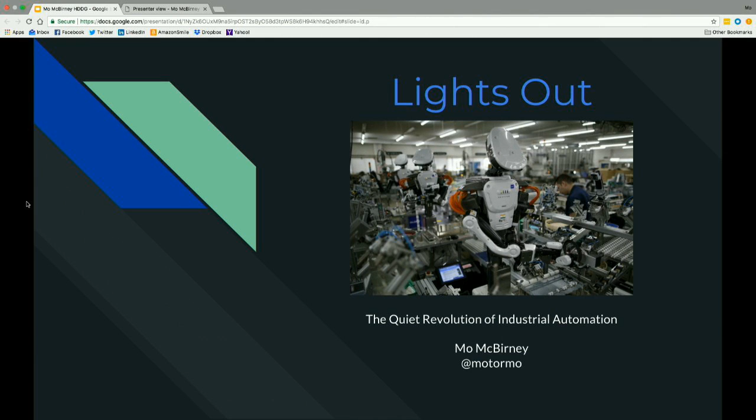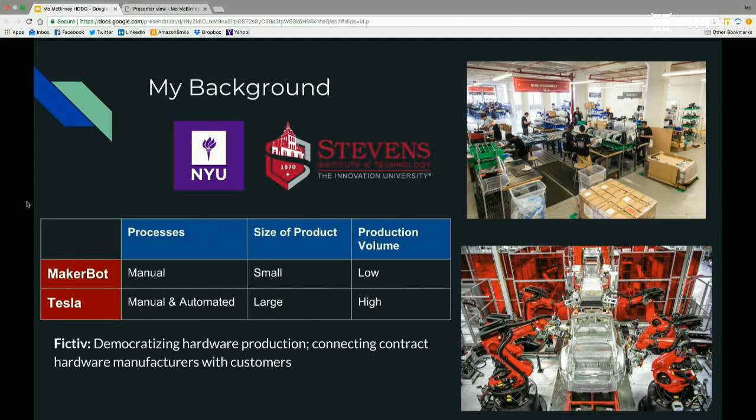So a little bit about me. I have two bachelor's degrees, one in math from NYU and one in mechanical engineering from the Stevens Institute of Technology in New Jersey. After I graduated, I went and worked at MakerBot. I worked in their factory in Brooklyn as a manufacturing intern, so that's where I got my manufacturing roots.

That factory was pretty much all manual processes. I was helping design assembly lines and work on products where we were really building them by hand, using fixtures that we made ourselves. It was extremely manual.

After my time at MakerBot, I went to work for Tesla. I was a manufacturing engineer there for about two years, and that was much more automated—partially manual, partially automated. Our products were much larger; we were making cars instead of 3D printers, and our production volume was much higher. When you're producing a huge number of products all the time, it's much better to have more automated processes because you can make products faster. As Tesla ramped toward the Model 3, with much higher production and cheaper vehicles, they needed to automate more processes, and I was involved in a lot of that as a manufacturing engineer.

Now I work for Fictiv. At Fictiv, we do smaller batch production and prototyping, connecting customers with small contract manufacturers to get their parts made for prototypes and small batch production—CNC machining, 3D printing—and we're expanding into other processes in the coming year.

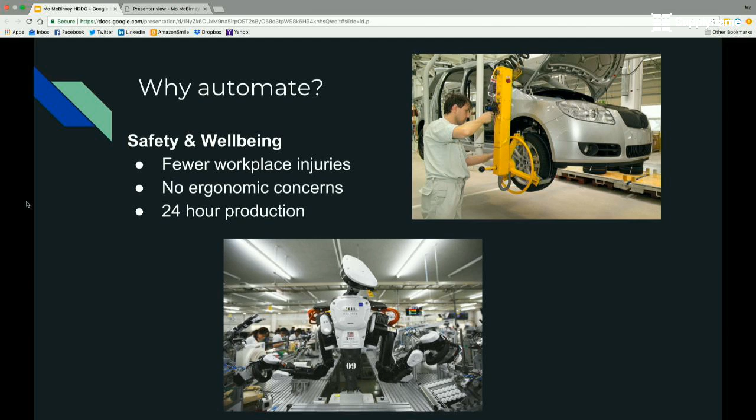Another great reason to automate is safety. After working in a few different factories myself, I can tell you it's difficult to make sure safety is a priority, because you're always balancing speed with safety and quality. You want to produce a quality product quickly and meet your sales numbers, but also keep all of your humans safe. So the more humans you use in a process on an assembly line, the harder it's going to be to keep them safe.

When you automate processes, you have fewer workplace injuries and no ergonomic concerns. Ergonomic concerns are something people don't think about a lot with automation, but it's huge, because when you have one person doing a manual process repetitively many times in a row, even if it wouldn't cause injury once or twice, doing it hundreds of times a day can cause repetitive stress injuries. Ergonomic concerns are huge in a factory, and there are whole teams dedicated to that, so not having to worry about that is great because machines are doing a lot of the heavy lifting.

You can also run pretty much 24-hour production because you don't have to worry about labor laws, overworking people, or fatigue, and that's huge. So that's why a lot of companies are leaning towards automation, because you're avoiding a lot of these human-related concerns. It's better for both the companies and the humans, because you really don't want to put humans through assembly and manufacturing processes that are difficult for humans to do over long periods of time, but really easy for machines to do hundreds or thousands of times in a row.

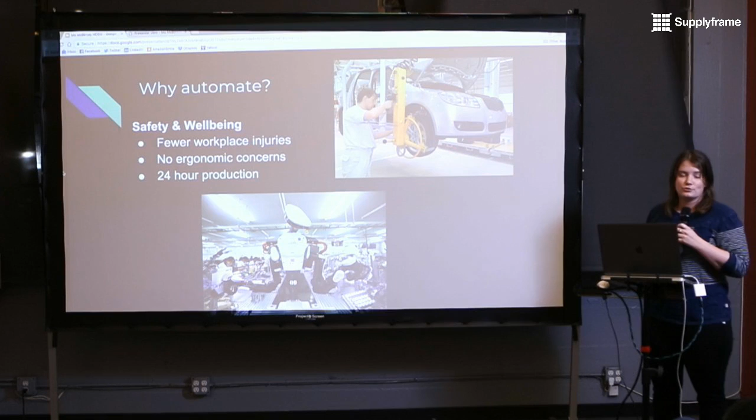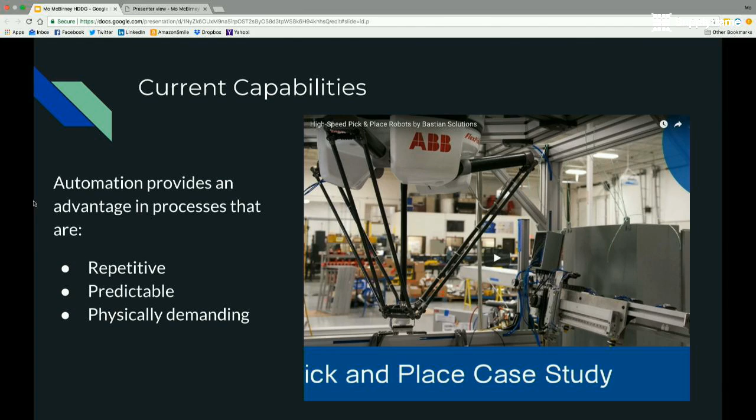So, the current capabilities of robotics. Automation provides an advantage in very specific processes for manufacturing, so it's not the best for everything, but for many things it is the best, because it's great for things that are repetitive, predictable, and physically demanding. Those types of processes are very easy to automate. I'm going to show a quick video about a pick-and-place robot, let's check it out.

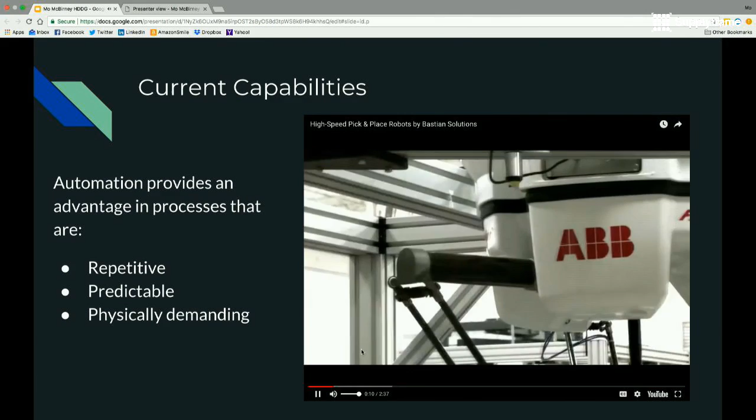I don't know if the sound is working. Is sound attached or no? That's okay. Oh, the microphone to the computer? I don't know if... That's okay, I can narrate.

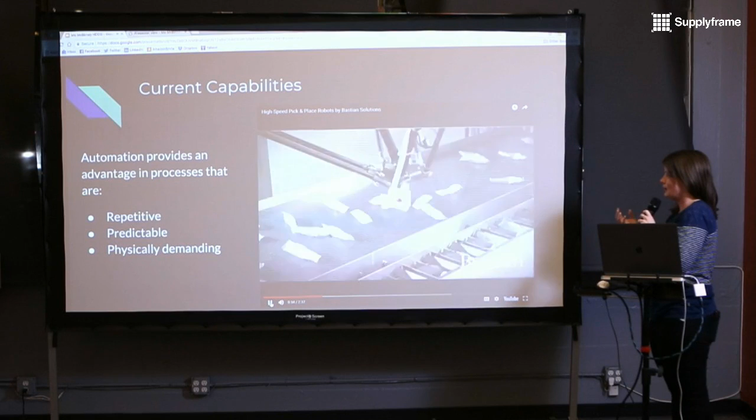This is a pick-and-place robot, and it's high-speed robotic picking. It uses a delta format robot to pick and place lots of small parts laterally across a space. You can see it grips small parts in a very repetitive motion, and it uses basic vision sensing to grab the parts and put them back on the conveyor on the other side. They're discussing some of the benefits: high quality, consistency, and little human interaction.

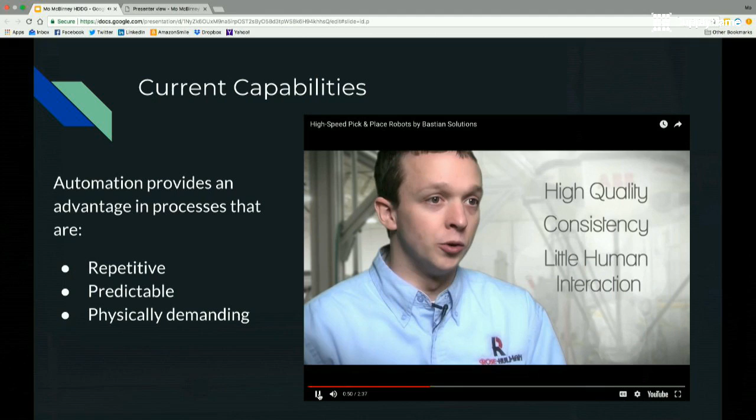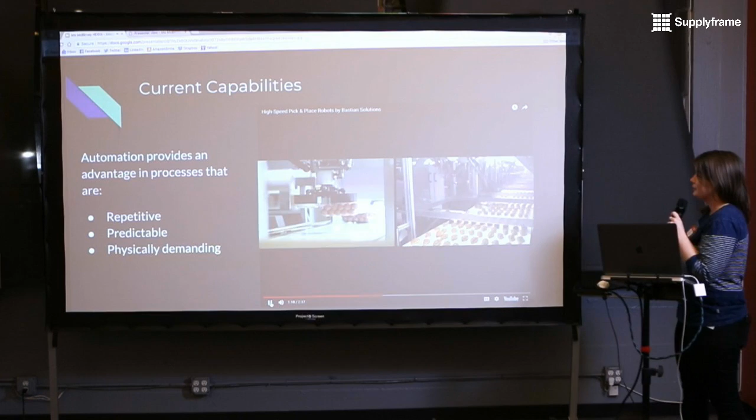One of the main things people focus on in current automation is minimal human interaction, because robots are not good at interacting with humans. Robots work best in automation in factories when they can move really quickly and do processes really quickly. When you have hard, sharp robots moving really quickly, they can hurt people. Especially when they're really big, even with something small like this, you really want to keep humans out of the equation. So there are lots of safety issues involved with using automation in robots.

You want to make sure the humans stay out of it. There are more automation technologies being developed right now which allow for more human interaction, with special sensors that sense when a human is near, so the human can interact with the robot to have it do different tasks. But it's still in the limited stages in manufacturing, and those robots have to move a lot slower, and they also aren't as precise as robots you can program to move without human interaction. That's one of the challenges of current robotics and automation in manufacturing.

All right, so limitations.

It's more difficult to automate tasks that require complex learning. Robots are starting to learn and apply knowledge later, but generally right now it's easiest if they have one task: sense current information, use it to their advantage, do the task, and move on. It's really difficult for them to learn from that.

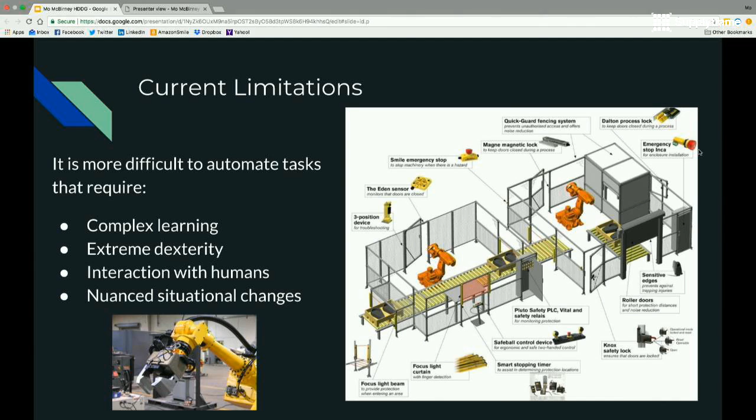Extreme dexterity, you can see on the bottom left a robot with a gripper. Generally grippers are pretty standard and only move in a few different directions, with only a few areas of movement. So it's hard for a robot to grip in non-predictable ways. They can grip one thing or a few things at a time, but it's hard for them to predict what they're going to grip and adapt to that.

As I said before, it's difficult for robots to interact with humans because humans are very fast and robots aren't good at sensing them. So on the right, these are a lot of the safety measures involved in an automated assembly line.

There are magnetic locks, fencing systems, emergency stops, and vision systems that sense if somebody's in the area. All of these are connected electronically to the robot so that if any safety curtain or safety scan is broken, the robot will stop, and the system has to be totally reset before it'll start running again.

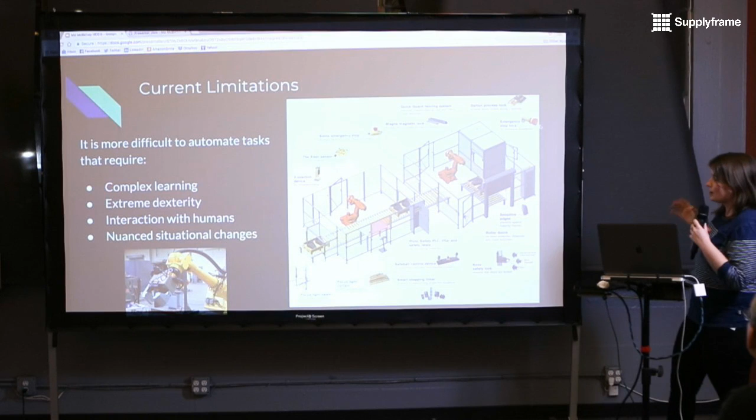A lot of these safety measures are made to keep humans from going into the system. It's really meant to have robots running 100% automation all the time. If humans do have to go in, there are safety measures involved, like a safety curtain that can turn off so somebody can go in, do part of a process, come back out, the curtain goes back on, and the process continues in an automated way.

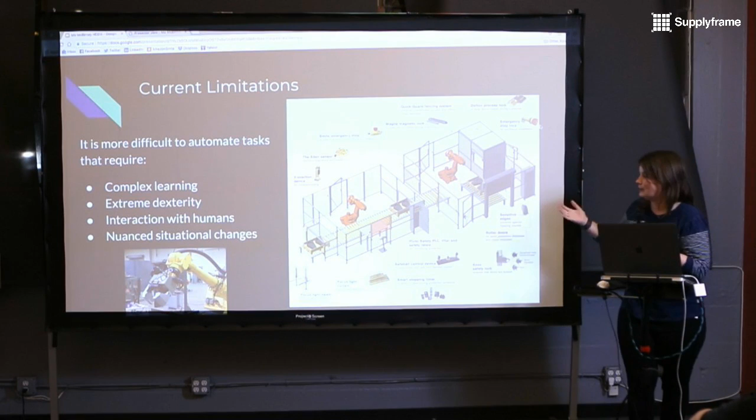So, areas of advancement for robotics and automation in general.

Improvements are going to keep happening in cognition, which is the robot's ability to perceive its environment. Currently most robots use either a 2D or 3D sensor, so they have a limited view of their environment. But as robots learn to see and perceive their environment better, they'll be able to interact better with humans.

Manipulation, precise control, and dexterity. A lot of ways robots interact with parts have to be extremely predictable, and they don't do well with improvising. If a robot can improvise and adapt to its environment better, advances in manipulation will really help automation take over more processes in manufacturing. And interaction is the robot's ability to learn from and collaborate with humans.

The key to the future of automation is to have all the tasks that can be automated, automated, but for things that can't be fully automated, to have robots work alongside humans safely, so that both humans and robots work together to get the most productivity out of that process. Because the reason we're bringing in automation is to increase productivity, so if we can increase it by having humans and robots working together, that's going to be key to the future.

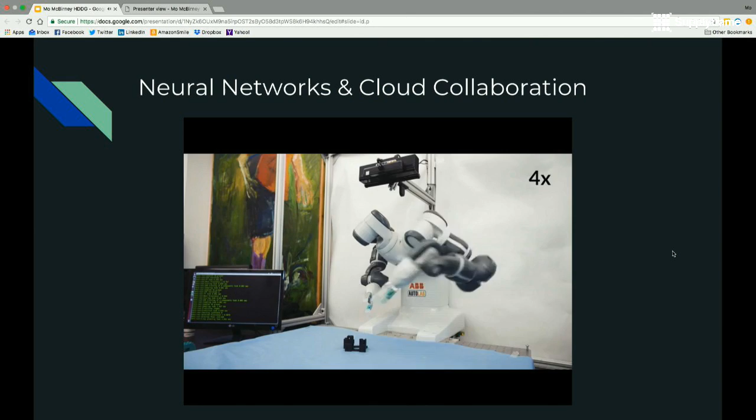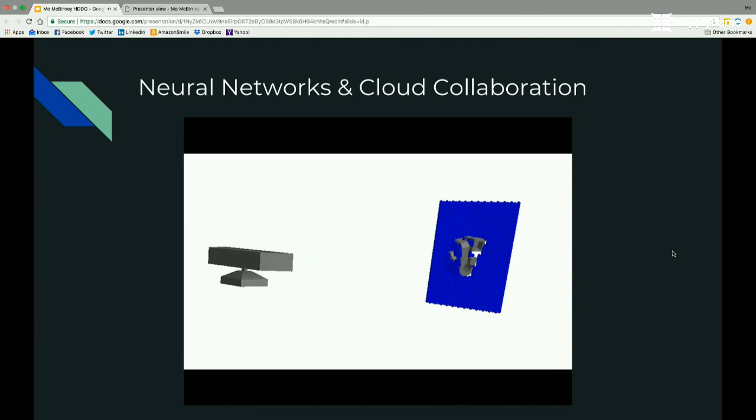This is at a lab in Berkeley, and they have a robot they taught to use a neural net to pick up objects. The initial 1.0 version of their software gave the robot knowledge of 10,000 objects, which it used to scan an object and figure out which points would be best to pick it up, and then pick it up. But their version 2.0 used a neural net, basically a robot brain, so it could learn to pick up almost any object, not based on 10,000 objects, but based on its brain.

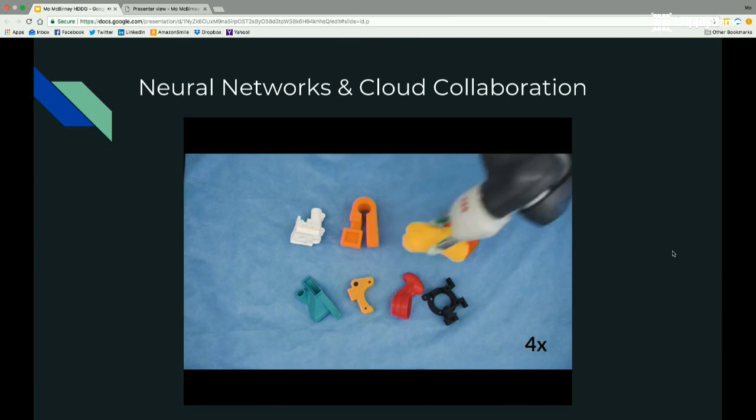I cannot explain neural nets very well, please do not ask me about them later, but I think they're very cool. It was able to pick up all these different types of objects. This is part of the future of automation: a robot seeing a pile of totally unpredictable things, scanning it, figuring out how to pick it up, predicting it, picking it up, and if it fails, learning why it failed so it can do better next time, able to pick up the object it failed to pick up the first time.

Pretty cool, right? Yeah. So, oh no, that's not what I wanted. Okay, we're good.

And also cloud collaboration. So something else in this is like having a neural net or having a way for a robot to learn from what it did before, which is having a lot of robots connected via the cloud. And so they all share this area of knowledge within the cloud.

So if you have a group of 20 robots that does the same type of task, and you need to buy robot number 21, you can bring it in. Robot 21 will just dial into that network that all of the other robots are on, and it'll know exactly what those robots have already learned. So being able to share that kind of knowledge among robots, and share the sensing and computing power among a large group of robots, is going to be huge for the future of automation.

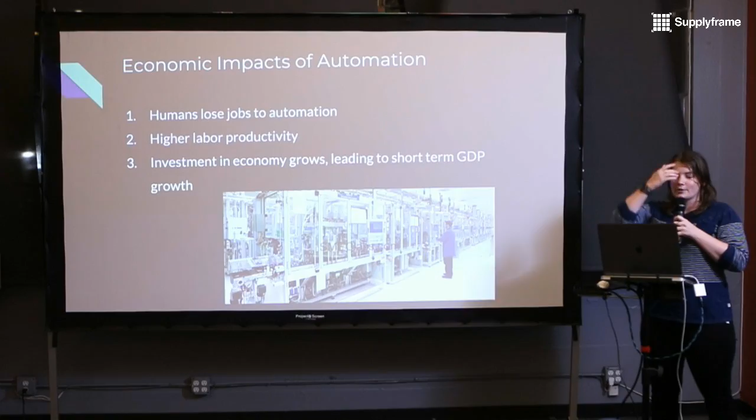So we're going to go a little less into the tech and a little more into the economics and sociological impacts of automation. Some of the economic impacts of automation are humans losing jobs to automation. This is sort of a given, but it's not necessarily a bad thing.

As I said before, a lot of the jobs that robots are going to be taking over are jobs that humans maybe shouldn't be doing anyway, because they're repetitive, boring, or can injure you. So if we can automate a process, we probably should. I'll go a little more into that later.

And then higher labor productivity. Productivity is how much work you can get done in a certain amount of time, how much work per worker. Productivity is just going to increase with automation, because in tasks that can be automated, the machines are going to be able to do more work than a human could in the same amount of time.

And also the investment in the economy grows, leading to short-term GDP growth. So investing in automation is going to help businesses grow, and in turn help the economy grow.

So the question that everybody's wondering: will robots take my job? Currently, as you can see on the right, 50% of current work activities are technically automatable by adapting currently demonstrated technologies - technology that already exists but isn't necessarily implemented yet. And 6 of 10 current occupations have more than 30% of activities that are technically automatable.

So really, there are a lot of jobs that are just waiting to be automated, and just waiting for this technology to be really able to be implemented in these industries.

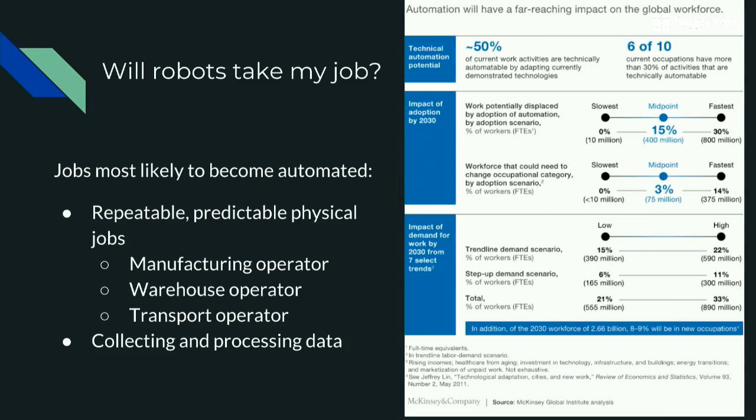So a lot of people are like, wow, I don't want to lose my job to automation - what am I going to do? And a lot of reactions are just, okay, no automation, that's a bad idea, I want to keep my job. But as I said, jobs that are most likely to become automated are repeatable, predictable, physical jobs.

So in manufacturing, that can be a lot of jobs - manufacturing operator, warehouse operator, transport operator - and also jobs that are collecting and processing data. But as I said, those are jobs that humans don't really need to do, and robots can do faster and more efficiently anyway. So the key to automation is job creation.